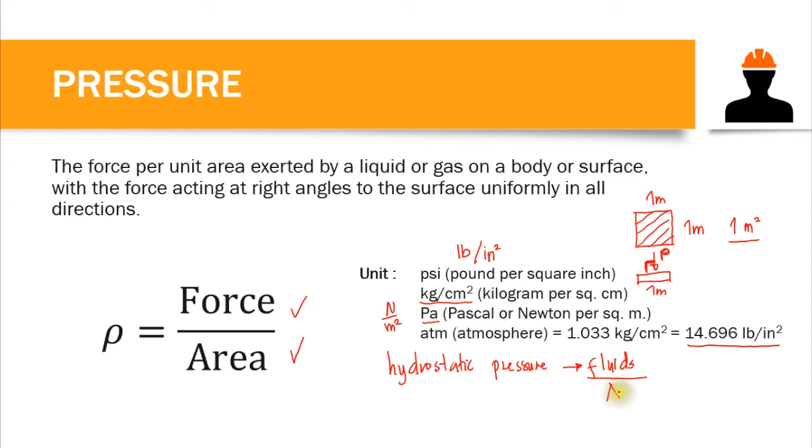So therefore we can say that hydrostatic pressure is the pressure due to the weight, or due to the force exerted by fluids, such as water, mercury, oil, salt water, and the like.

So we have this famous law in fluid mechanics, Pascal's law, developed by French scientist Blaise Pascal. According to this law, the pressure on a fluid is equal in all directions and in all parts of the container. Let's say this is our container; then the pressure on all walls is equal in magnitude. So if we have pressure A here, we have pressure A here as well,

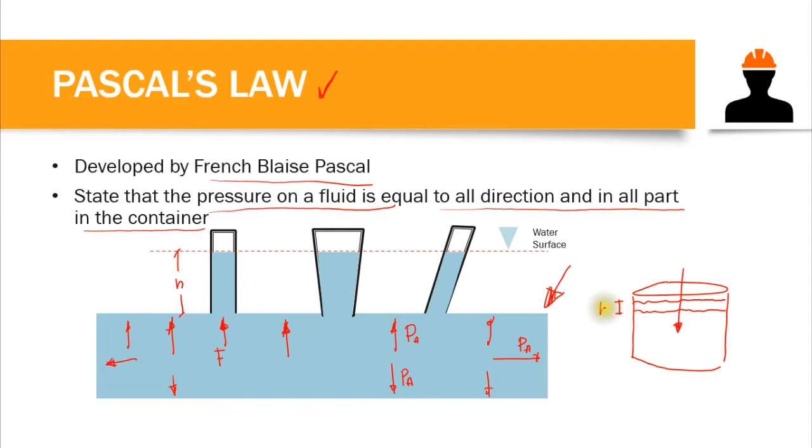and at this point. Since we have a pressure acting on all walls of the container, that gives us a force, and that force creates a vertical head of water, an increase in the height of our water. Imagine you have a glass of water and you try to compress that water; you notice that the water rises, and we have H, what we call the water head or the pressure head.

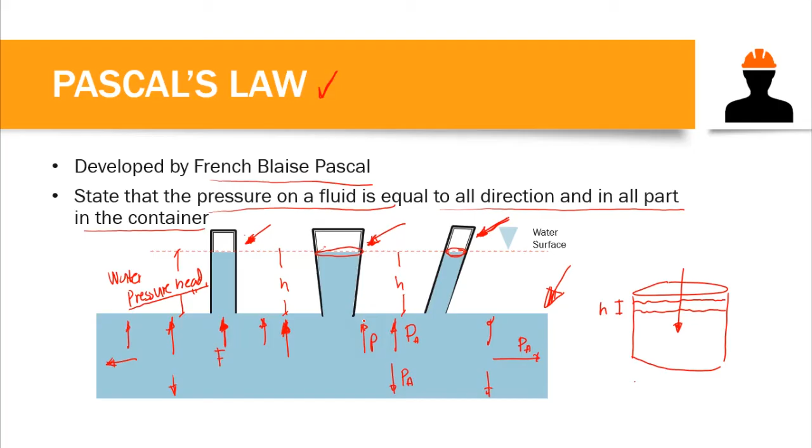Again, this pressure head is caused by the force acting towards the wall. As you can see on the top surface of our container, we have three distinct openings: a cylindrical opening, a frustum opening, and an oblique cylindrical opening. They have the same vertical head despite the orientations of the openings, because we have the same pressure all throughout, according to Pascal's law.

Now we have gauge pressure. This is the pressure read by pressure gauges or manometers. An example of a manometer is the U-tube. This U-tube gives us the change in the head, and that change in head gives us the pressure. Later, I am going to show you the relationship between the pressure and the pressure head. So, gauge pressure is the pressure above or below the atmosphere.

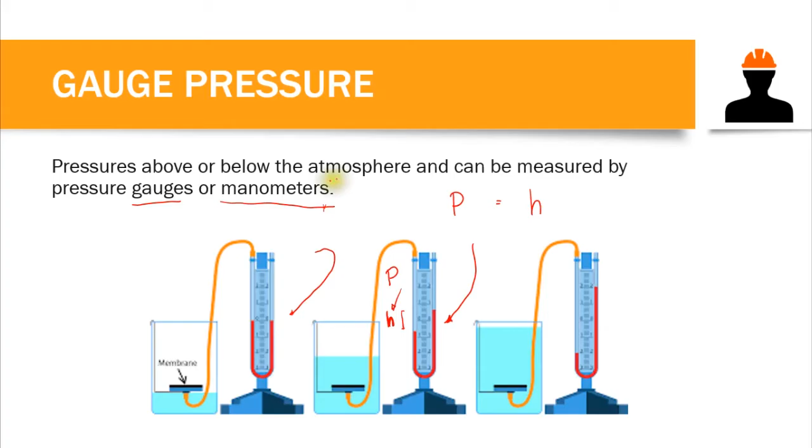We also have atmospheric pressure, the pressure at any point on the earth from the weight of the air above. So, atmospheric pressure is the pressure on the earth's surface due to the weight of the air. The standard atmospheric pressure values are 2,166 pound per square foot, 14.7 pound per square inch, and equivalent to the height of mercury, 29.9 inches.

So, if we put a barometer or a manometer on the Earth's surface, the reading of our mercury would be 29.9 inches. That is the head of mercury due to the atmosphere. Or in SI, 760 millimeters of mercury, or 101.325 kilopascal. These are the standard values of atmospheric pressure. Again, atmospheric pressure is the pressure due to the weight of the air above it.

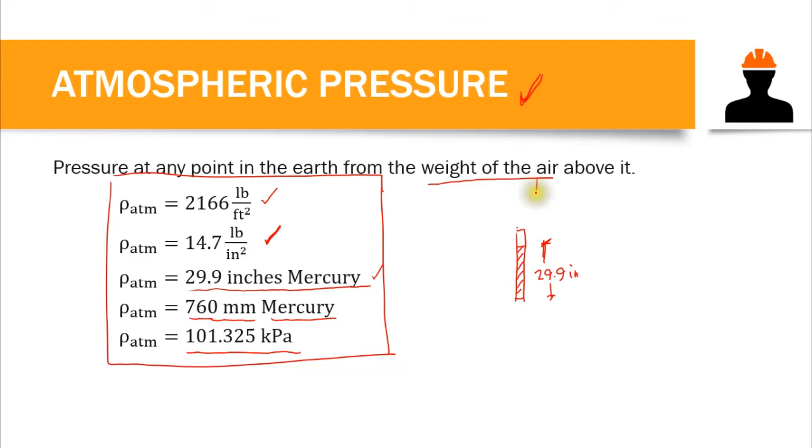We also have what we call the absolute pressure. Absolute pressure is the pressure above absolute zero. Absolute zero is the pressure in a perfect vacuum. Now, what is vacuum, by the way?

A vacuum is a region or space devoid of gas, meaning a region in which there is no existence of matter - walang matter, even gas, even molecules. But in reality, we cannot create a perfect vacuum in the laboratory, since we have atmosphere, oxygen, gases, and molecules around us.

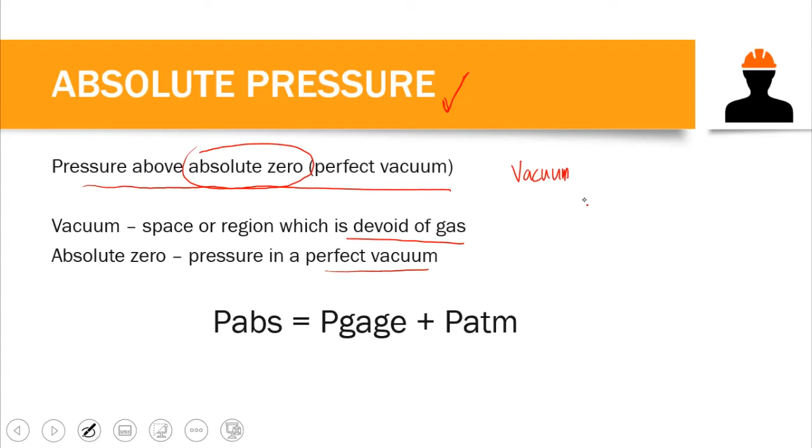Absolute pressure is the pressure relative to the pressure in a perfect vacuum. The formula for absolute pressure is the gauge pressure plus the atmospheric pressure. That's how you compute the absolute pressure.

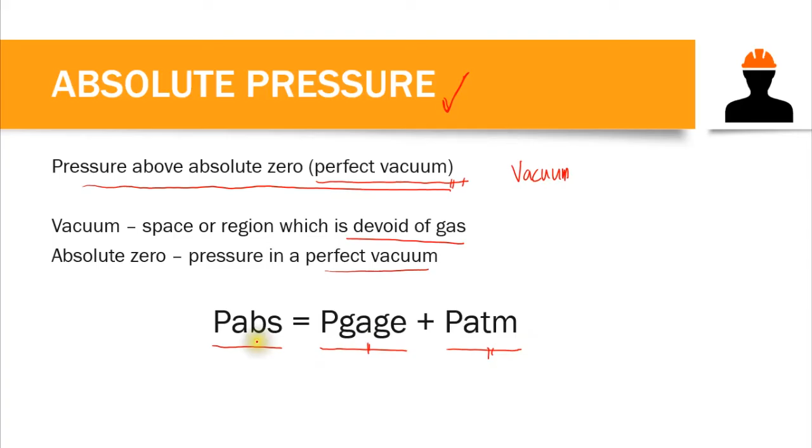So we have this formula: the pressure at point 2 minus the pressure at point 1 is equal to the unit weight of the liquid times the difference in height. Therefore, to compute the pressure at 2, it is basically equal to the pressure at point 1 plus the unit weight of the liquid times the distance between the two points.

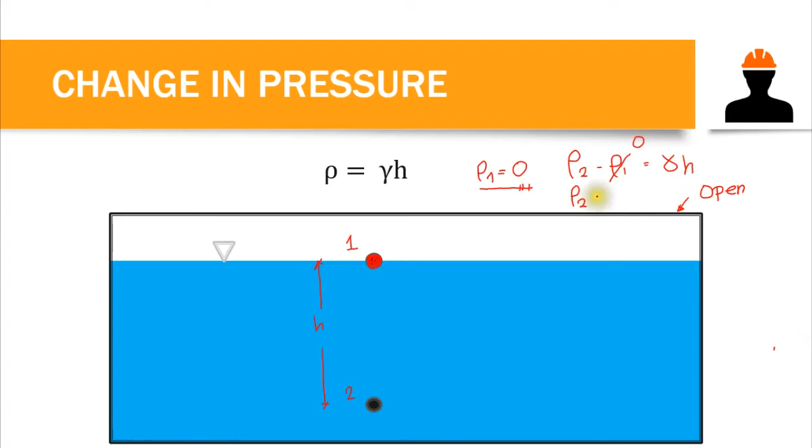From the formula, pressure at 2 minus pressure at 1 is equal to the unit weight of the liquid times the difference in height, or the vertical distance between the two points. We know that pressure at 1 is equal to 0 because it's exposed to air, especially if this is an open container. So we can say that pressure at 2 is equivalent to the unit weight of the liquid times the height or distance of point 2 from the liquid surface. This is the formula to compute pressure at any point on the bottom of our liquid.

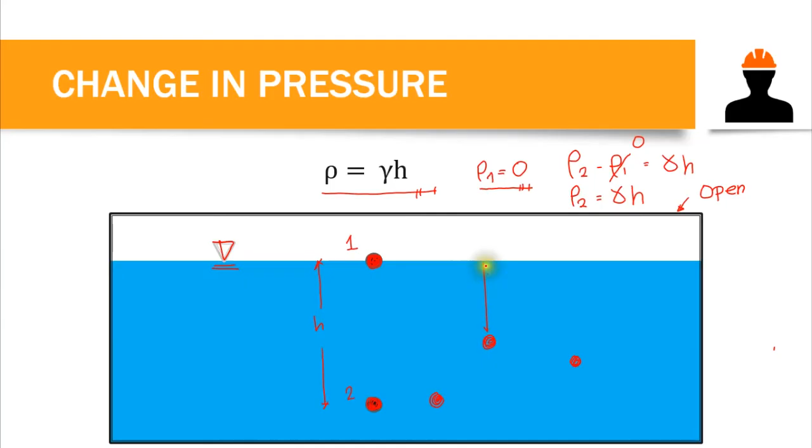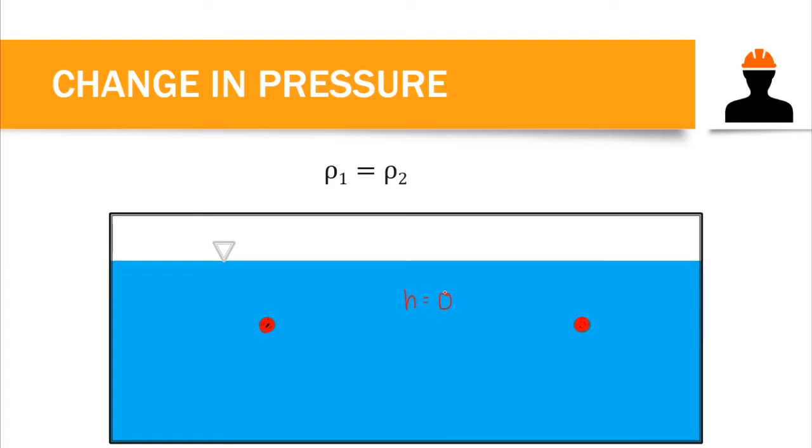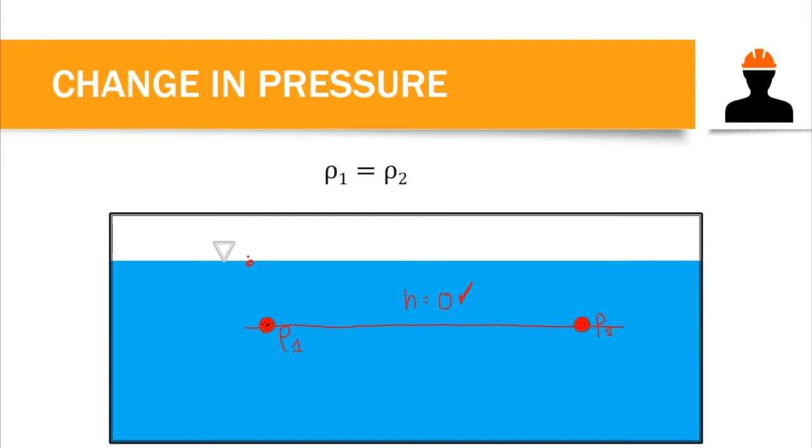Now what if the two points are level horizontally? Take note, their h, or difference in height, is equivalent to 0, so they do not have a distance between the two points. Therefore we can say that pressure at 1 is equal to pressure at 2, since they are on the same level and do not have a difference in elevation from the surface of our liquid. And we have here the pressure head.

Pressure head is the height of a column of homogeneous liquid that will produce an intensity of pressure. Due to the pressure there would be an increase in the vertical height, and that is what we call the pressure head. We know that pressure is basically equal to the unit weight of the fluid times the pressure head, or the head. Then we can say H, or the head, is equal to pressure over the unit weight of any fluid.

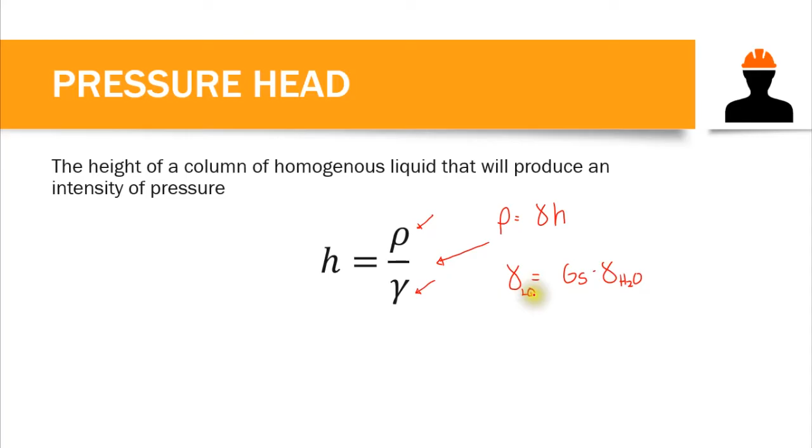We know that the unit weight is equal to the specific gravity times the unit weight of water - that is the unit weight of any liquid. Now, in order to convert the equivalent head of a specific fluid to another fluid, let's say you want to convert the equivalent height of liquid A to liquid B. We know that they have the same pressure, so pressure A is equal to pressure B, and therefore they would have a different height. So the one variable there that would vary is the specific gravity and the height.

We know that the unit weight of A times the height of A is equal to the unit weight of B times the height of B. Then, unit weight of A is equal to the specific gravity of A times the unit weight of water, times the height of A, which equals the specific gravity of B times the unit weight of water, times the height of B. We can cancel out the unit weight of water. So therefore, the height of B is equivalent to the height of A times the specific gravity of liquid A over the specific gravity of liquid B.

So this is how you convert the height of a liquid to the height of another liquid, okay, with equivalent pressure.

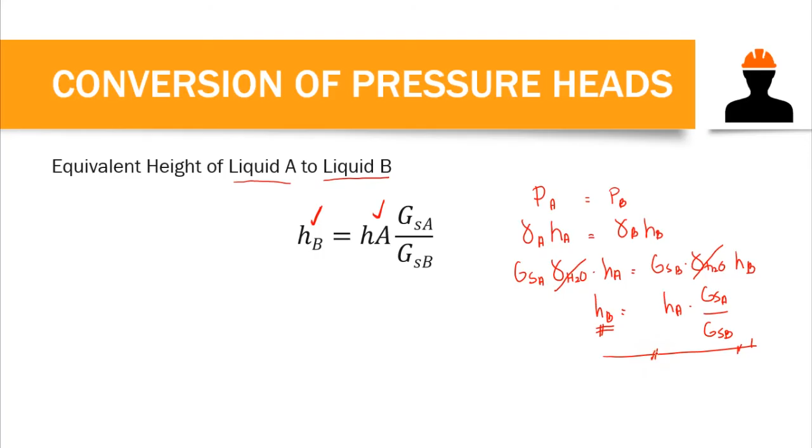Now let's try to solve an example here. I prepared a set of examples. We have our first example here: Find the absolute pressure in kilopascal at a depth of 10 meters below the free surface of oil.

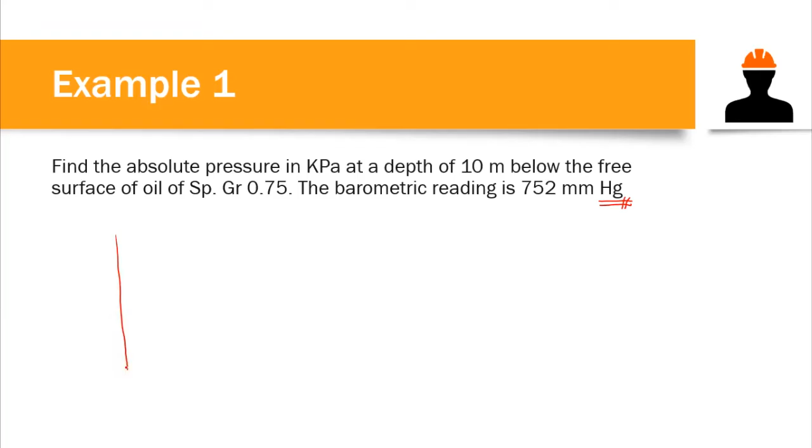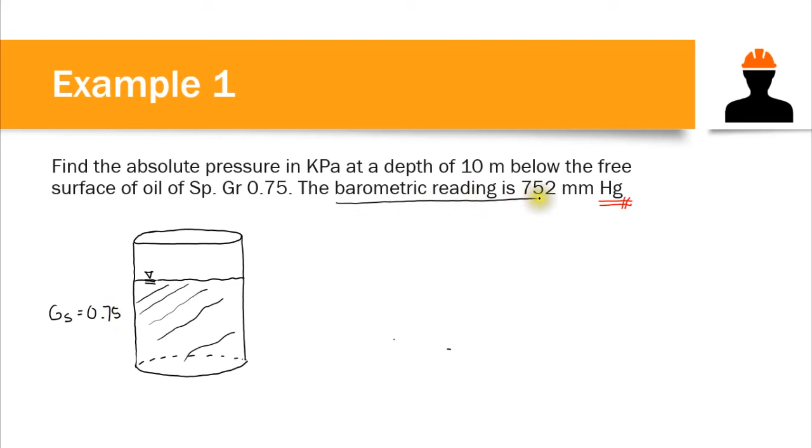The oil has a specific gravity of 0.75. The barometric reading is 752 millimeters, and that is in terms of mercury, or that is the height of mercury. Now take note, we have a tank, and this tank contains oil on the surface. So this is oil, which has a specific gravity of 0.75.

Now, barometric pressure here is the atmospheric pressure. And we have the given atmospheric pressure here, which is equal to 752 millimeters in terms of the height of mercury.

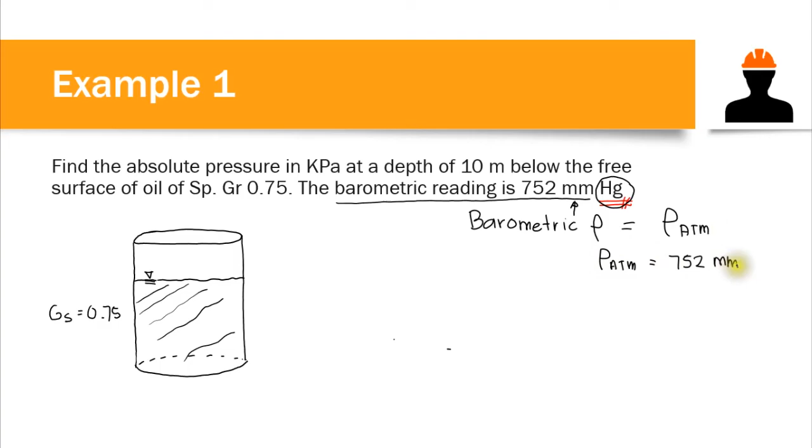So the atmospheric pressure here can be computed as the unit weight of the mercury times the height of the mercury. Now we know that unit weight is equal to the specific gravity times the unit weight of water, correct? So the specific gravity of mercury is equivalent to 13.6 — that's the standard specific gravity of mercury. So we have 13.6 times the unit weight of water, which is 9.81 kilonewton per cubic meter.

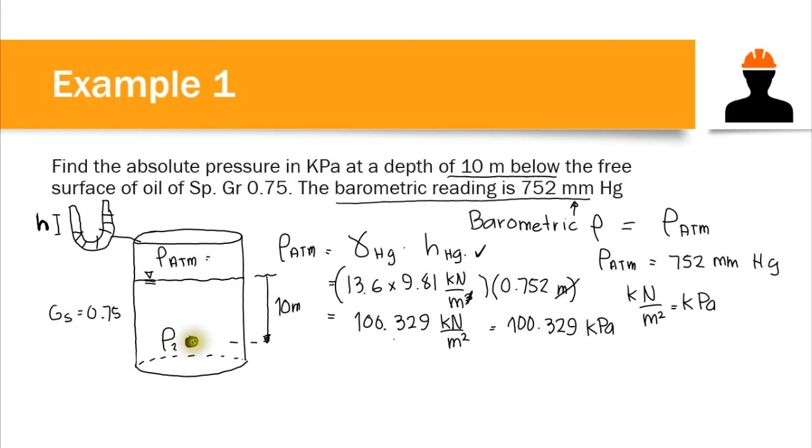So we have this atmospheric pressure, but again we compute for the absolute pressure at a depth of 10 meters below the free surface. So from this free surface, 10 meters down. So we compute for the gauge pressure at this point. How are we going to compute the pressure? Let's say this is our pressure 2. So pressure 2 is basically from the formula: pressure at 2 minus pressure at 1 is equal to the unit weight of the liquid times the height difference. But in this case, our pressure 1 is on the surface.

So we just need to compute the pressure by: pressure equals the unit weight of the liquid times the height. In this case, the unit weight of the liquid is oil, so we have 0.75 times the unit weight of water, which is 9.81, times the height or distance of 10 meters from the oil surface. This gives us 73.575 kilopascal, which is our gauge pressure at 10 meters below the free surface.

So we can now compute the absolute pressure using the formula: absolute pressure is equivalent to the gauge pressure plus the atmospheric pressure. So we have the gauge pressure, which is 73.575, plus the atmospheric pressure, which is 100.329, and this equals 173.904, in kilopascal.